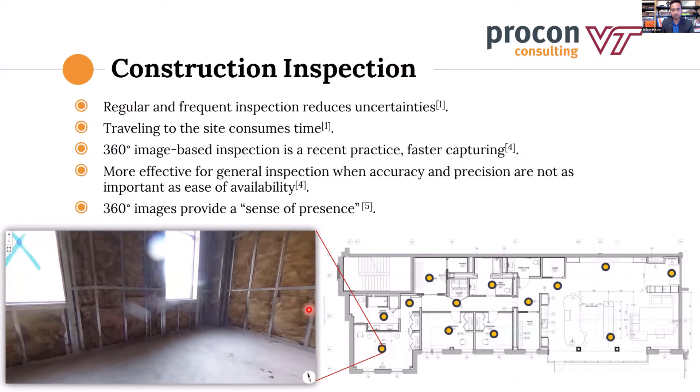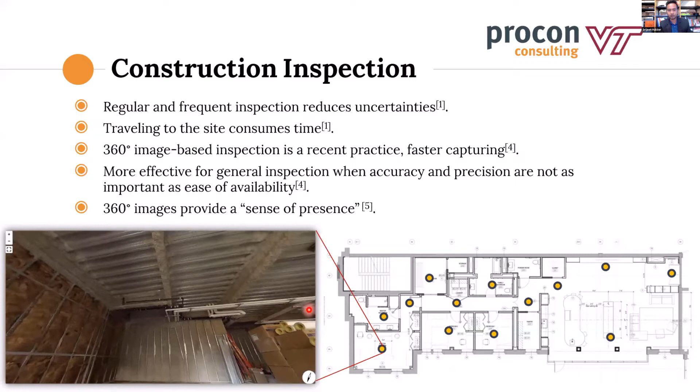Typically, this is how a human inspector captures an image with a 360-degree camera using this type of tool. He has a tablet PC, an iPad, in one hand, which is running the app, where he can see the floor plan and the points where the images will be captured. He localizes himself using physical landmarks like the column here or the beam on the top, and once he's at the position, he uses the 360-degree camera to click an image.

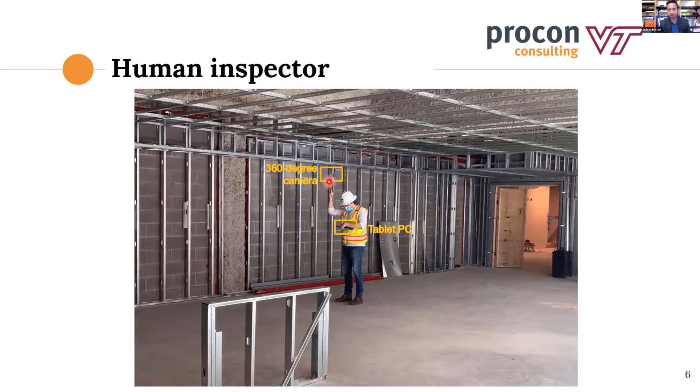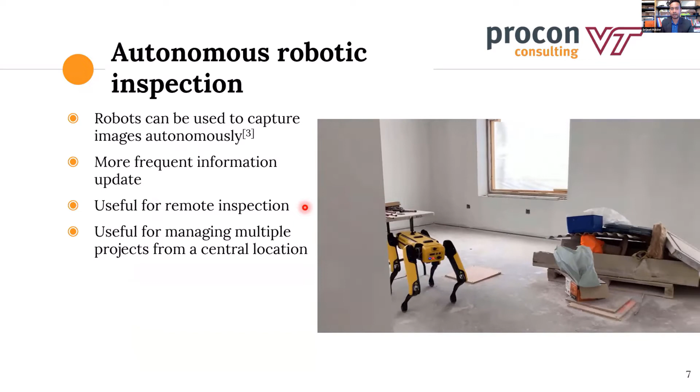Our research is basically an exploratory research where we wanted to find out if it is possible to automate this process using a legged robot. The advantage of having a robot is that it can work autonomously and capture images more frequently, multiple times a day, so that the most updated information is always available to all the stakeholders. It also facilitates remote inspection if a certain project stakeholder cannot come to the site because they are managing multiple sites at any given time. So they can use it from a central location to manage multiple projects.

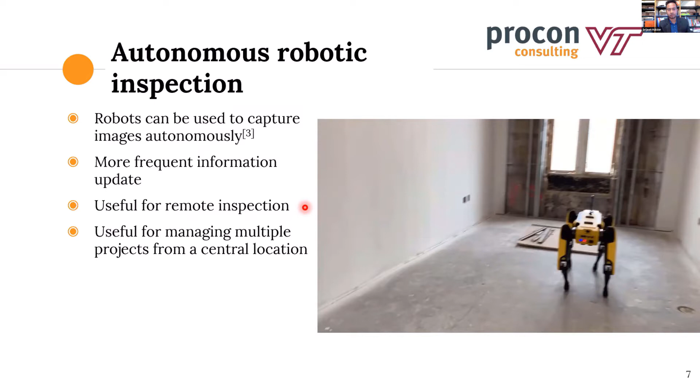For this experiment, we used the Spot robot, which is a quadruped robot by Boston Dynamics, meaning it has 4 legs. Having legs allows it to navigate on unfinished surfaces, which are prevalent on construction sites. It also enables the robot to navigate to multiple floors using the stairs, which is more important, so that the robot can monitor the whole building without any human assistance.

This robot also has built-in autonomy features. You can record paths and then it can repeat those paths and click images, or you can also control it programmatically through a Wi-Fi connection using the SDK provided by the manufacturer.

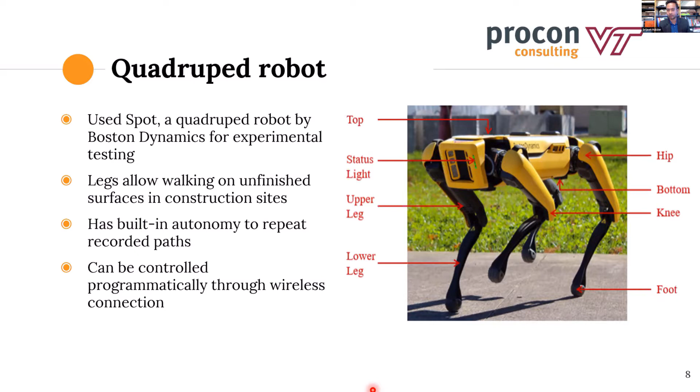So our proposed methodology is to create a 3D virtual environment and extract the information from the BIM model and use that information for mission planning to generate the path, and then use that mission information to control the robot programmatically, autonomously, and the robot will complete the mission, take images, and then send back those images to the virtual environment for visualization, which can be used by the inspector.

Now, the advantage of having a 3D virtual environment over a 2D floor plan is that in a 2D floor plan, it is difficult to show multiple disciplines. For example, if you want to show architecture, electrical, mechanical, structural in one drawing, it makes it too cluttered to be any useful. But having a 3D virtual environment is not only more intuitive, but you can also see different models from different disciplines all together at once.

So for the 3D virtual environment, we exported an FBX file from Revit and we imported it in Unity. Unity is primarily a game engine which is used for game development, but many researchers and even practitioners have used it for augmented reality and virtual reality development as well. Unity provides a lot of visualization features, as well as it has a scripting backend, which uses the C# language.

So we use the geometric information and the semantic information from the BIM model to create missions. We created these goal points in the building where the robot will go autonomously, repeatedly, and take images. And then the user can walk through this virtual environment and see these points and see the 360-degree images captured from these locations.

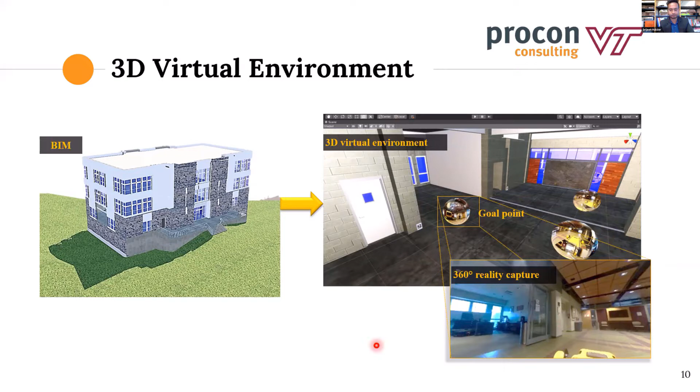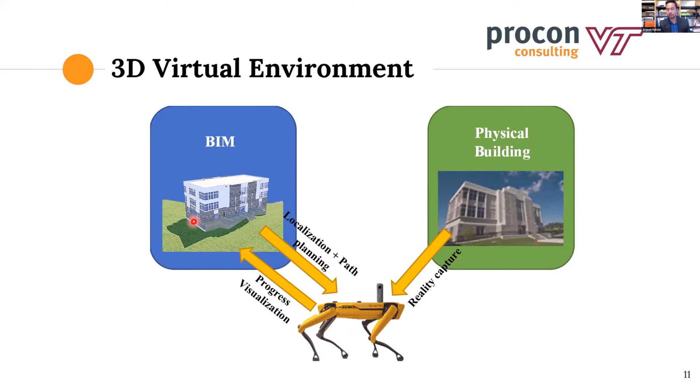So the methodology was implemented using Unity and Python in two parts. Unity was used for creating the virtual environment and for mission planning. And then the mission data was sent to the Python code through an HTTP connection to control the robot. Since the manufacturer provides the SDK in the Python language, that's why Python was the first choice.

There is a Ricoh Theta V camera attached on top of the robot, and the code triggers the camera once the robot reaches one of the points, and then sends this 360-degree image back to the virtual environment in Unity for visualization.

The process starts here with the localization. We extract the information from the robot. I'll get back to the localization point again. So we see if there is any fiducial visible from any of the cameras all around the robot. And if it is, we get the coordinates of that. And from that, we calculate where the robot is within the space in the process called localization. And then we use that initial location information and the geometric information from the BIM. And we also use the Unity NavMesh agent, which in its backend uses the A-star search algorithm for finding the optimum path.

Now for localization, we use the AprilTag fiducial. AprilTag provides fast detection for robotics, and it is widely used for localization purposes. As you can see here, an AprilTag is pasted on the column. It's printed on a simple letter size paper, and a virtual representation of that fiducial is pasted on this virtual column in the virtual environment.

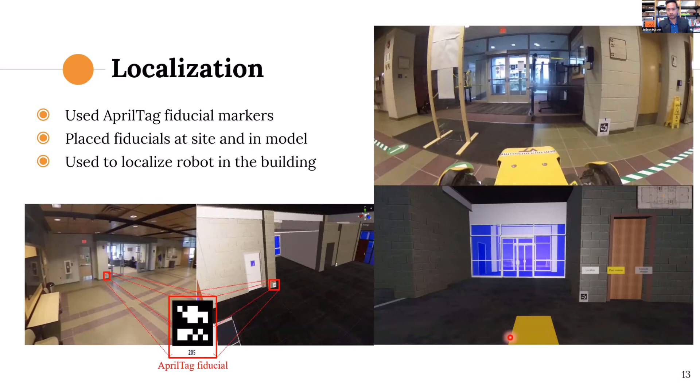In the second stage, we develop the mission. The mission is basically an autonomous behavior, which comprises the coordinates on the path and also the coordinates of the goal points with respect to different fiducials. And when the robot executes the mission, it finds which is the closest fiducial, and then it gets the coordinate of every point with respect to the closest fiducial. And then we move the robot to all the points one by one.

On the path, there are goal points and there are waypoints. So waypoints are intermediate points which the robot will go through one by one, but won't capture an image. But in the goal point, the robot will capture an image.

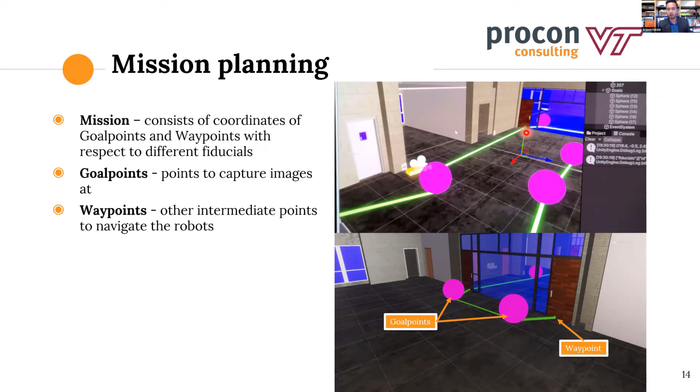We also use the semantic information from the BIM model to define the spaces, surfaces which are walkable and non-walkable. So we defined the elements belonging to the floor, the door, and the stairs family to be walkable, and other things like the walls as non-walkable surfaces. This is useful to calculate the optimum path so that the robot does not go through the wall, but instead goes through the door.

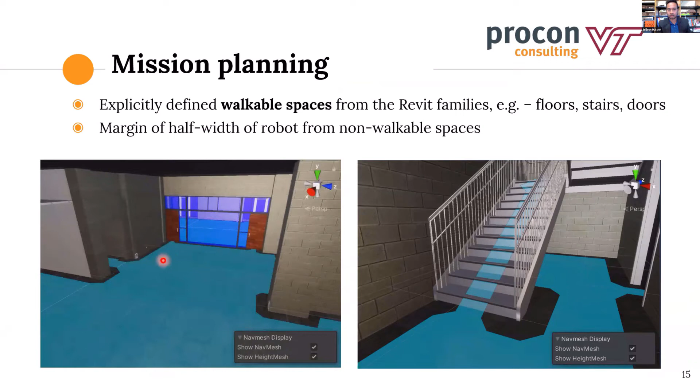And so we tested this methodology in the Bishop-Favrao Hall of Virginia Tech campus. We created 6 goal points in the second floor of the building. We started the robot from here, and the robot went through all of these goal points one by one and clicked an image.

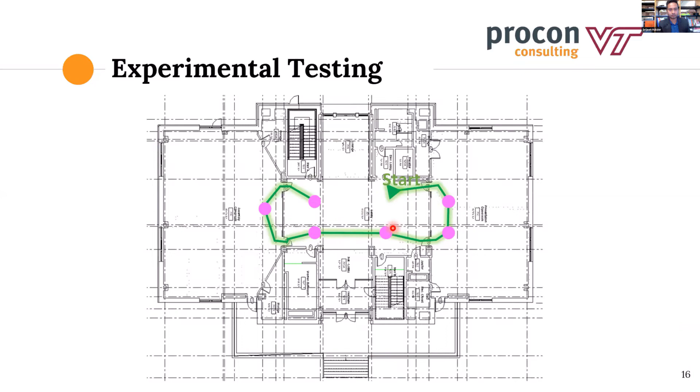Here is a small demo of the overall implementation. So on your left here, you can see the whole left side is the virtual environment. And on the extreme left, you see the overall view. And in the middle here, you see it from the robot's point of view. And on your right, you see the real environment.

So once we had set the goal point, the program calculates the mission, the path, and then it controls the robot through the path using the SDK.

So once it reaches a particular goal point, it stops there and triggers the camera to capture a 360-degree image. The 360-degree image is stored in the camera until the end of the mission, and after that, it is extracted to be visualized in the virtual environment.

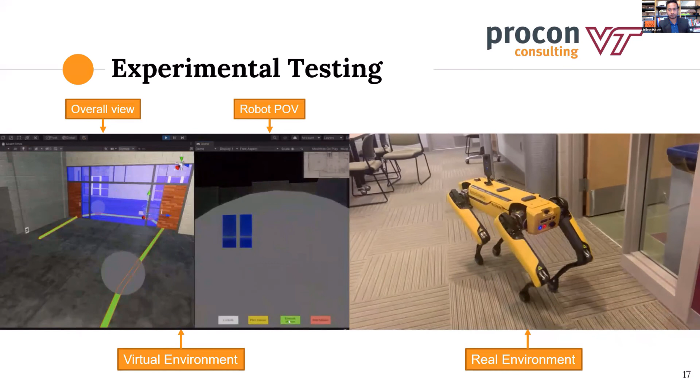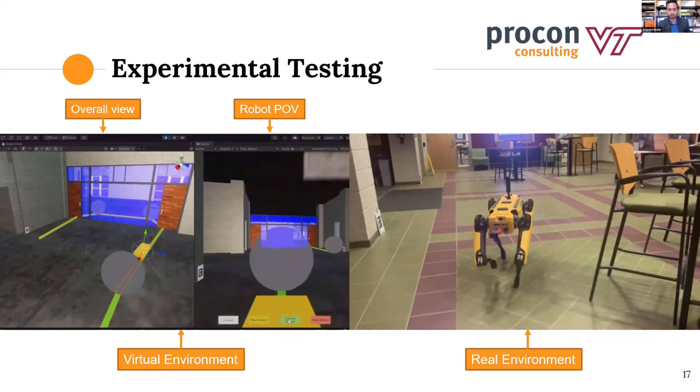So once the mission is completed, those images are sent back to Unity for visualization, and those 360-degree images are applied as textures to these spheres, and then the user can walk through the virtual environment like in Navisworks. But in this, not only can they see the model, but they can also see the reality captures from these points.

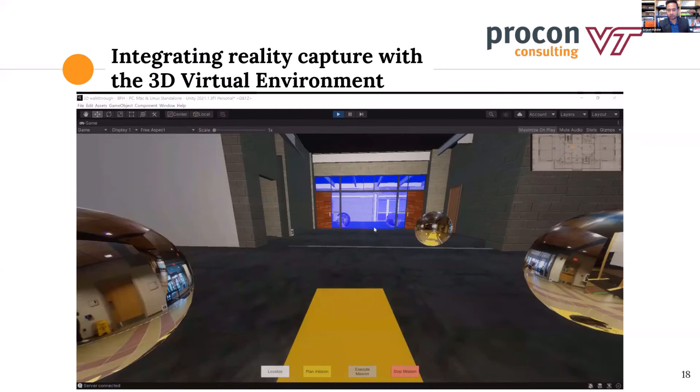So the user can control the virtual robot through their mouse or mouse and keyboard. So this is an ongoing research project, and we are still figuring out how we can make it more autonomous and independent, so that it requires much less human assistance.

But there are still some limitations of the study. For example, we rely on the as-built model of the building. If the model is not available, or if it is not an exact representation of the actual building, then the mission might fail. We also use anchor-based or marker-based localization.

We use the AprilTag fiducials, which are basically printed on letter-size papers and pasted on the job site. And the idea is to have it stay there, and then the robot will use it every day to complete the mission. But if the fiducials are dislocated or torn or obscured by some obstacle, then the mission will fail and the robot will get confused, because it is expecting that fiducial at a particular location.

We also did not take into account blocked paths. For example, if this door had been closed, then the robot will get stuck like this. The manufacturer provides a robotic arm which can be used to open the doors like this autonomously, but we did not test that in this current study.